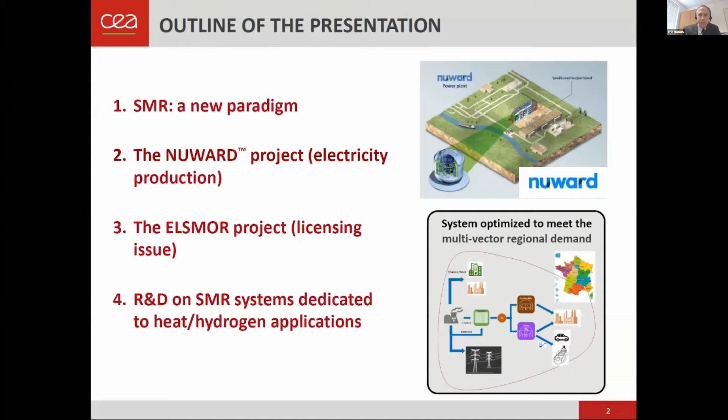So just one slide about the SMR and the challenges and success factors that we are facing. Clearly, what you see on the figures, it's a traditional scale effect, which explains why, for instance, in France, we've been increasing the unit power from 900 to 1300 and now 1650 megawatt with the EPR. And that has a positive impact on the levelized cost of electricity.

So obviously, if we want to be competitive with SMR, and that's our target, we need to operate on three levers. The first one is to act on the conception, to have a simple and safe conception. I'll be showing that for NUWARD. We are aiming at integrated architectures, and that will help us reduce the initiating events. And also one advantage with SMR is the small size with the low residual heat that can be released through passive safety systems.

Sometimes we forget that the M of SMR means modularity. And clearly modularity has to be taken into account at the early stage of conception and also in the manufacturing process. By that, you'll be having modules that are manufactured and tested in factories. Then they will be transported in containers. And this procedure will allow a reduced on-site construction time.

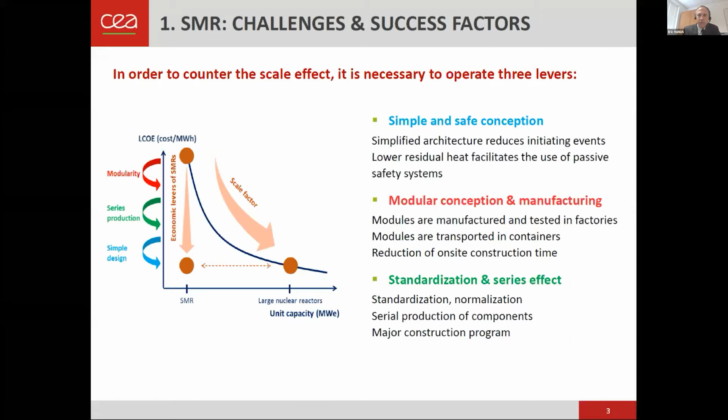Now, let me explain the product we are developing now in France, which is called the NUWARD project. So NUWARD is a 340 electric megawatt power plant, including 2 reactors. It is an integrated reactor. As I mentioned earlier, we benefit from an integrated architecture where you have the steam generators and the pressurizer inside the pressure vessel. This pressure vessel is integrated in a metallic containment, which is immersed in a water basin, as you can see on the right-hand side. To give you some idea, the pressure vessel is the same size as a 900 electric megawatt one. And the containment is typically a sphere of, let's say, 15 to 16 meter diameter.

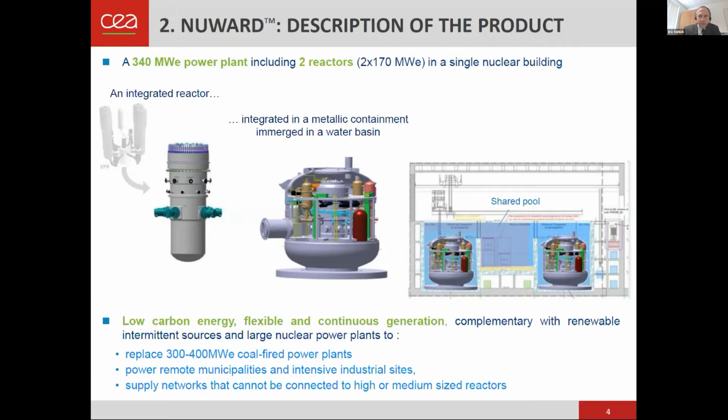With that project, what market are we aiming at? Clearly, we want to provide low carbon energy, flexible power generation, complementary to renewable intermittent sources and large nuclear power plants. We're not opposing the two. The market we want to replace is the coal-fired power plants that are in the range of 300 to 400 electric megawatt. We'd like also to power remote municipalities and large industrial sites, and also supply networks that cannot be fitted with larger size reactors.

So that slide is quite important, and I'll take some time to describe it properly with you. It's about the technologies and innovations that we are developing within the NUWARD project. So clearly our ambition is to have this innovation within the product. Once again, I mentioned integrated architecture. What's the positive impact of these architectures? Clearly, you have the primary cooling system inside the RPV, which means that you reduce the risk of loss of coolant accident. To give you an idea, the maximum pipe connected to the vessel is 30 millimeter, which is clearly very, very small.

Another challenge: we have developed steam generators with a plate design. And that's clearly a differentiating issue because it allows us to have the most compact design worldwide. Another item is the immersed control rod mechanism. All the control rods are within the vessel. By doing that, since you have the same pressure all around, you eliminate the rod ejection risk.

I already mentioned that with SMR, you have a small residual heat to remove, and you can do it passively. And we do that with the system we call RRP, with a heat exchanger inside the vessel that is connected to the condenser, which is cooled down with the water wall I mentioned around the containment.

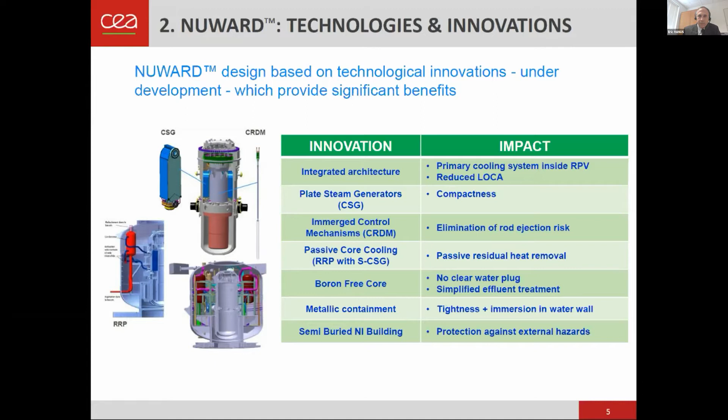Now, I won't go into detail, but just to give you an idea about the roadmap and the partnership around NUWARD. We've been performing some feasibility studies for, let's say, 10 years now. We finalized a pre-conceptual design phase in 2019, and at the moment we are in the middle of the conceptual design phase. Our roadmap ends up with a NUWARD product that will be available to meet market needs by 2030.

The project is led by EDF, Électricité de France, with its strategic partners, so CEA, Naval Group, TechnicAtome, and it's got the support of the French government. We have some funding at the moment from the French Economic Recovery Plan. And this project is open to international cooperation.

The name of the project, NUWARD, which means nuclear forward, was launched at the IAEA General Conference in September 2019. And at the same conference, we signed a framework agreement between EDF, CEA, and Westinghouse to explore potential cooperation on SMR development.

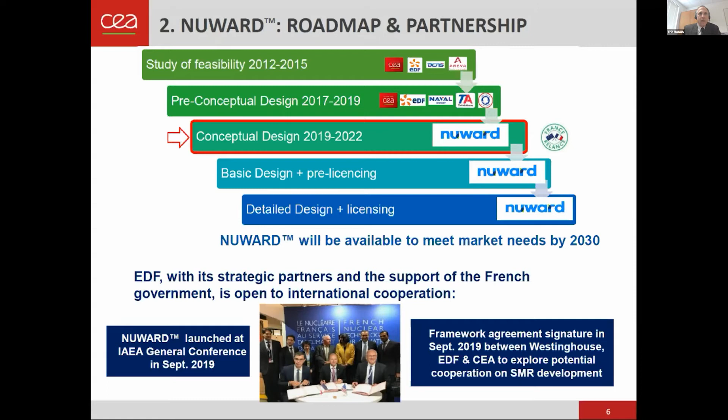Now, I move on to the last part of my talk, dedicated to new applications, that is to say hydrogen and heat. Within the energy transition program, where many countries aim at reaching carbon neutrality by 2050, like France, we have launched at the CEA a new research field on PWR SMR and hybrid systems. This research area can be split into 4 axes, and we have placed under axis 1 the market studies, and that to us is clearly important. We're not doing technology push, but we are willing to answer a market demand.

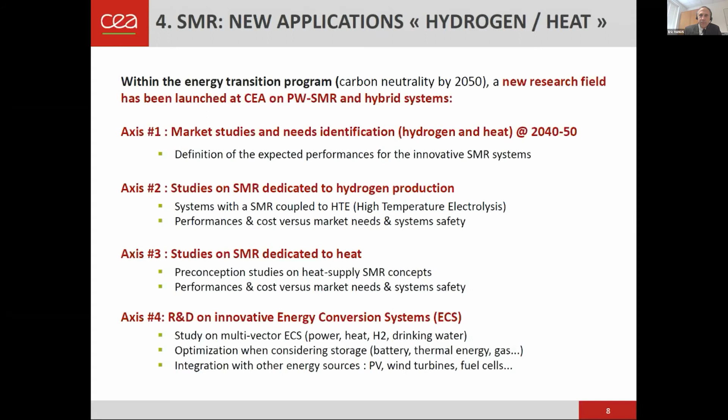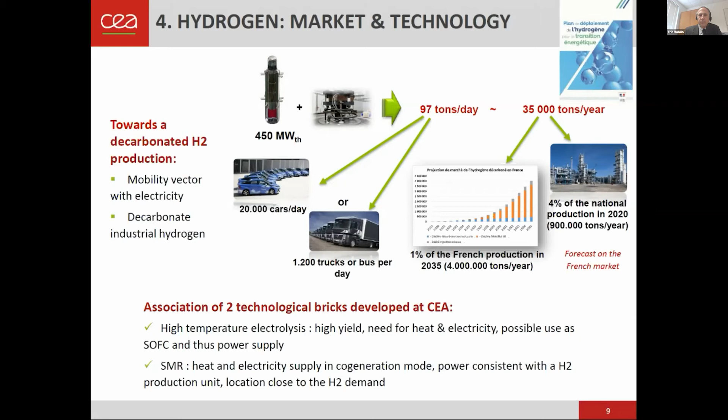If we go into more details on this slide, you can see the integration we can have between the two systems, the SMR and the HTE SOEC. So the same scenario as the one I mentioned before, providing 100 tons of hydrogen a day. What we see here is that the electrolyzer needs some power and also some heat. The ratio is the following: it's about 7% of thermal energy compared to the 93 remaining heat that is converted with the turbine into electricity.

So at the moment, we have the two schemes. On the left-hand side, the SMR, and on the right-hand side, the HTE. And we have identified different ways to couple both systems with different intake points to take heat from the Rankine system of the SMR. And we can also work on different supply modes, which can either be direct or indirect supply mode. And also when coupling more intimately the two systems, we can benefit from the waste heat from the HTE and bring back some heat to the SMR.

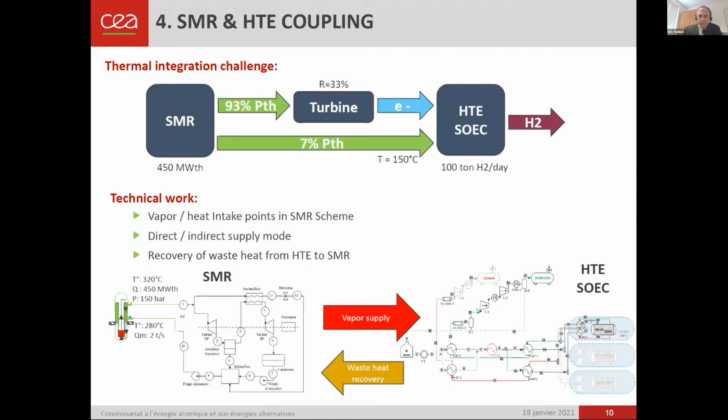Now, if I move on to the heat application, at the moment, the idea we have is that district heating is quite diverse in Europe. I just want to share with you this figure where you can see on the y-axis the share of renewable energy and recovery in the district heating, against on the x-axis the share of district heating in the global heat consumption. So typically, like in France and Spain, you have countries where the share of district heating is rather small versus the global heat consumption.

In the opposite, you have, like Germany or Poland, a higher share of district heating, but these are mainly fossil-fueled district heating. And that's nice for you Nordic countries. You have these dots on the right-hand side of Northern Europe, where you have well-developed district heating, and they're rather green.

If we look now at some deeper evaluation in two countries, France and Finland, to give you some figures about the global demand: in France, we have identified it's about 450 terawatt-hours for district heating, and the typical size is about 40 thermal megawatt. In Finland, there was a presentation from a colleague of yours, Professor Hyvärinen, 2 years ago, who tried to figure out how nuclear SMR could fit in within this district heating segmentation in Finland, and he proposed two types of coverage with pretty large units at 120 thermal megawatt and a lot of smaller units around 24 thermal megawatt.

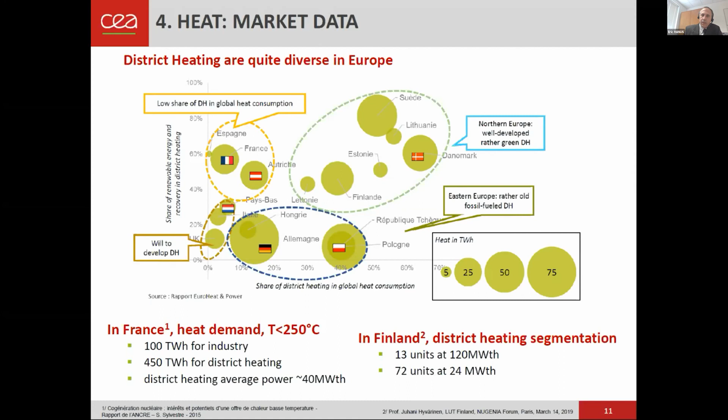How does that end up with technical studies? What we did first at CEA, we've set up some functional requirements for the small modular reactors for the district heating type with a nominal power, indeed quite large, 100 thermal megawatt, providing liquid water at 110 degrees and getting water back from the district heating grid at 70 degrees. The design we are working out now has no primary pump. It has no boron within the core management, and it allows load following from 30 to 100% demand. And it relies on passive safety designs.

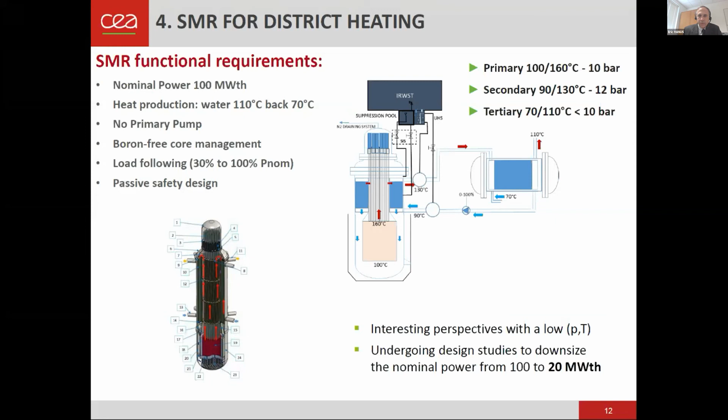The outcome of the studies is written here on the figures. What's very interesting is clearly the temperatures are pretty low. You end up at the primary circuit with an inlet temperature at 100 degrees and outlet temperature at 160 degrees, and what is very nice is the associated pressure, only 10 bars. So that gives us very interesting perspectives with such low temperature and pressure when we want to dimension all the components and the economics behind that. And currently, to take into account the market aspect I've just shown you previously, we are moving our studies to downsize the nominal power from 100 to 20 thermal megawatt.

What are the perspectives? Clearly, the objective of this R&D work is to bring some techno-economic data to evaluate the feasibility of such SMR hybrid systems to propose a carbon-free solution in a moving multi-vector use of energy. So we don't know at this stage what we will be ending up with: SMR working in cogeneration, delivering power when the electricity prices are high, moving to heat deliveries, having hydrogen production, storage, but that's the system we want to work in. And I just mention here a small note that within the next Euratom call, where you have some drafts circulating at the moment, we are promoting at CEA a proposal to work on this issue of SMRs with heat and hydrogen applications.

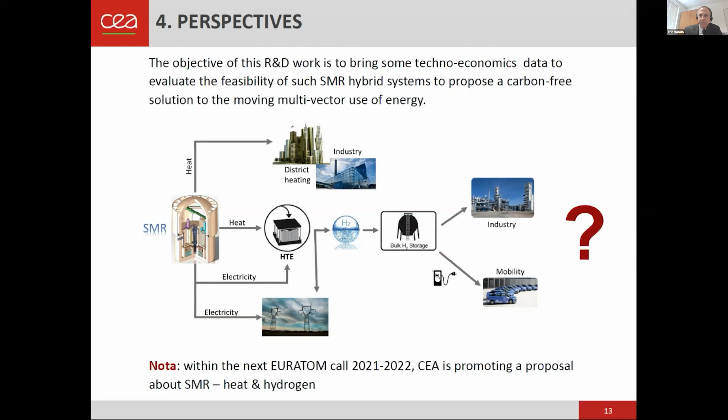Finally, to summarize, the R&D activities at CEA on PWR SMRs are participating in the industrial NUWARD project, developing R&D on a hybrid SMR system to decarbonize heat application and hydrogen production, and promoting projects at European scale, and hopefully a next proposal for the coming call.